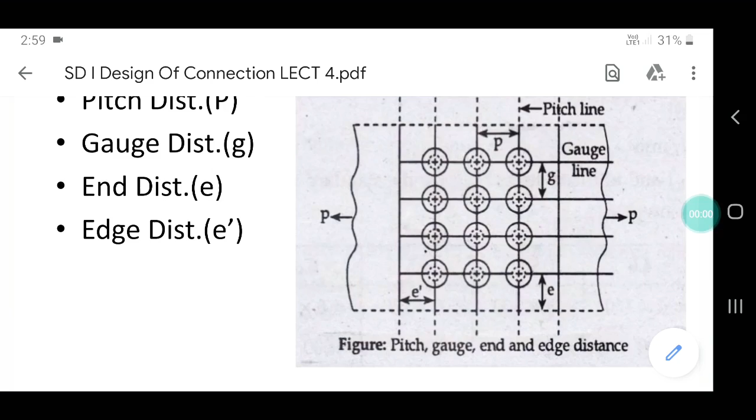I'm Professor Kakade. We are learning Structural Design 1, the second chapter, Design of Connection. This is the fourth lecture of Design of Connection. In the last lecture, we studied the joints of bolted connections. There are two kinds of joints, that is lap joint and butt joint.

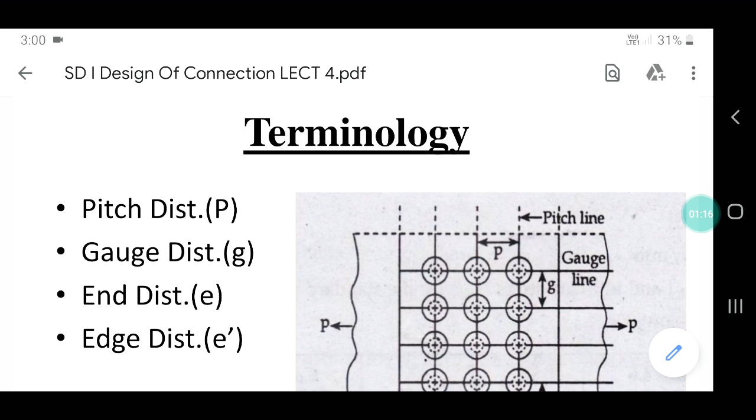In this type there are divisions like single cover butt joint, double cover butt joint, single bolted lap joint, and double bolted lap joint. Their advantages, disadvantages, and all the terminology we studied in the previous lecture. In this lecture we are going to learn about the terminology and failure of bolted joints. These two points are going to be covered in this video, so stay tuned.

The terminology contains four distances. While we are designing the connection, there are some notations or values required for the design. In such situations, we have to know about this terminology, what is its definition, and what is its maximum and minimum limit. On the right side of the screen, you can see the figure of this whole terminology: pitch distance, gauge distance, end distance, and edge distance.

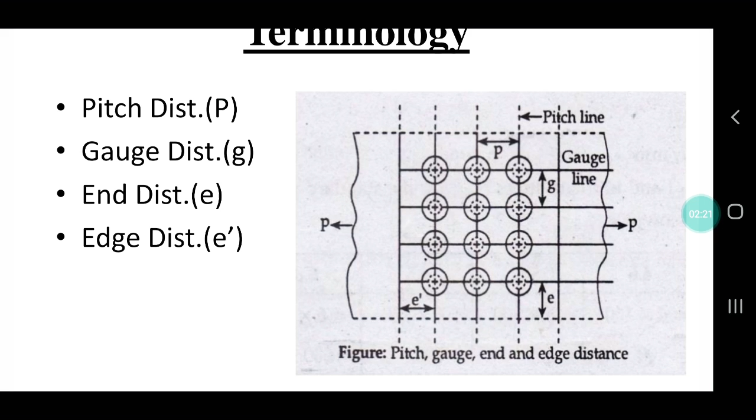The notation for the pitch distance is P, for the gauge distance G, for end distance it is E, and for edge distance it is E dash. So what is meant by pitch distance? It is the distance from center to center of a bolt in the direction of applied force.

I forgot to refer here, there is a P, arrows on the left or right side of the plate, which show the force notation, like the force acting in the tensile direction of value P. This arrow shows the direction of the load, and the center to center distance between two bolts in the direction of the load or force is known as the pitch distance. So it is the distance between two bolts.

Next is the gauge distance: the distance between two consecutive bolts perpendicular to the direction of force is known as the gauge distance. Sufficient pitch and gauge distance should be provided to avoid the different failures of the connection. That's why this terminology came into the design chapter, to show the different notations and their importance.

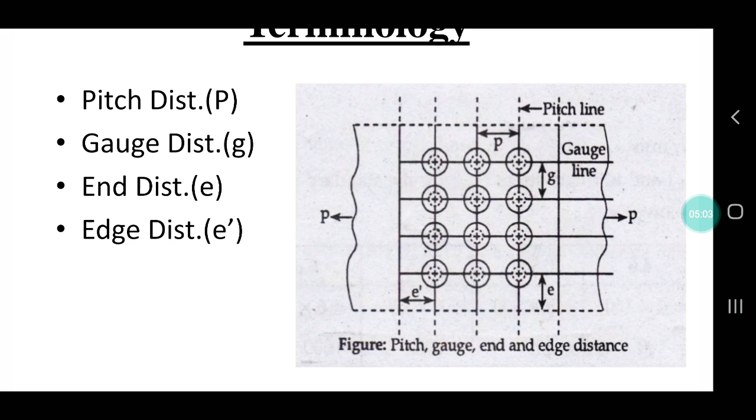They are interrelated: pitch distance and gauge distance are interrelated, and end distance and edge distance are interrelated. The difference is that pitch distance and end distance are in the direction of force, and gauge distance and edge distance are perpendicular to the direction of force.

There are other specifications which we require while designing the connection. The first one is the diameter of hole. While inserting the bolt into the hole, it might be quite problematic when it is not vertical. Generally it is not always vertical, or there might be some problem. That's why we have to keep some clearance to insert the bolt.

In such a situation, what should be the clearance? It is referred to in this table. The table shows serial number, nominal diameter of bolt in mm, and standard clearance. How much clearance should be provided for different bolt diameters is shown in this table. If the diameter of a bolt is from 12 mm to 14 mm, the hole should be greater by 1 mm. So if the diameter of a bolt is 14 mm, the diameter of hole will be 15 mm.

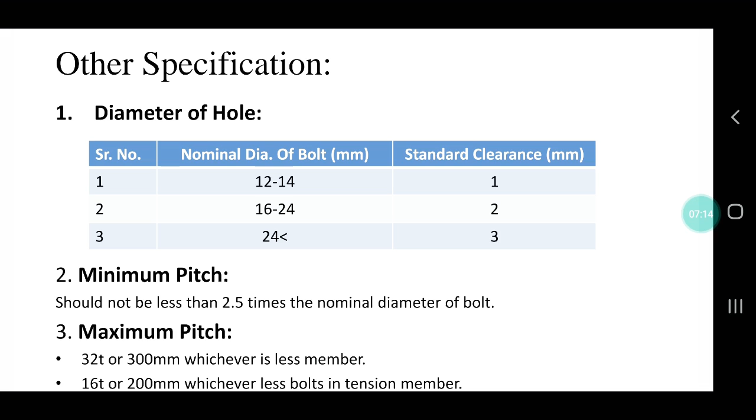I have to mention here, when we do the design, the nominal diameter of bolt is indicated by small d, and the diameter of hole is indicated by d0. Next, if the diameter of bolt is greater than 24, the standard clearance is 3 mm. Like if the diameter of a bolt is 27, the diameter of hole will be 30 mm.

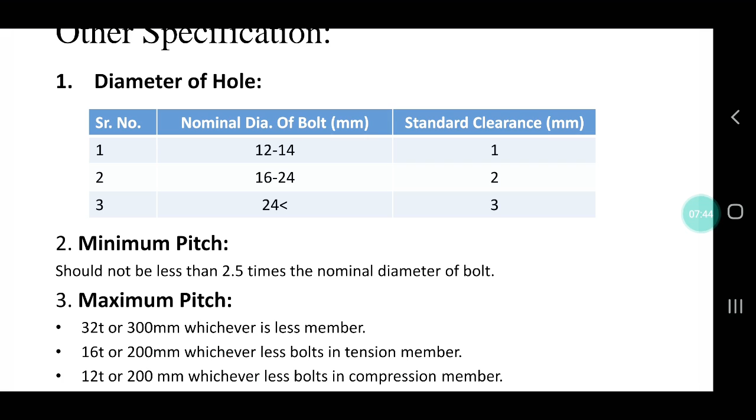Next point is minimum pitch: the distance between the centers of the bolts in the direction of load should not be less than 2.5 times the nominal diameter of a bolt. This is important. Why is that kind of specification included in IS 800:2007?

The reason behind that is, if we reduce the pitch distance, here we can see, consider these two bolts which are showing the distance P, which is pitch. If we bring these bolts closer, the stress in the area between these bolt holes is tremendously increased. Area is reduced, load is constant, so stress will be increased.

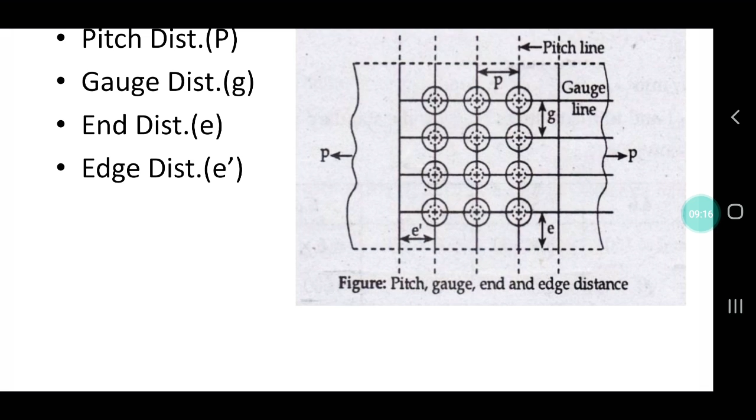In such a situation, if the stress increases, the chances of failure of that area are more than the other areas. So that's why the minimum pitch distance is considered and provided. So what is it? It is 2.5 times the nominal diameter of the bolt.

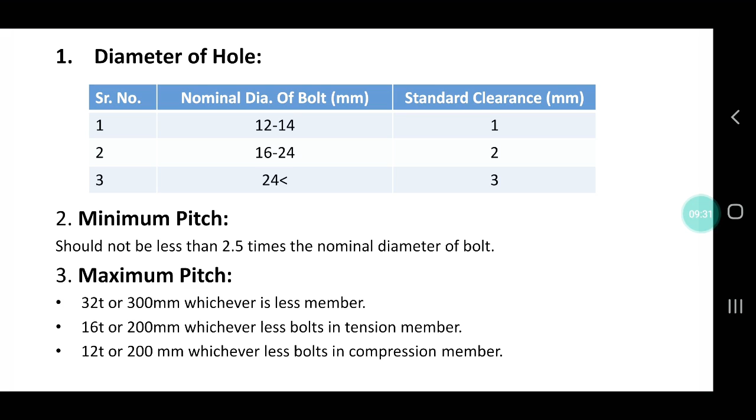Next point is the maximum pitch. Why should the maximum pitch be considered? If we increase the pitch, the distance between two bolts is very high. In such a situation, the stress transfer or the connection between the two members might be loose, and it will cause a problem. Bending or shearing problems could happen.

So that's why maximum pitch is also mentioned here: 32T or 300 mm, whichever is less, for the bolts in members including tacking bolts. What are tacking bolts? Tacking bolts are bolts provided at the middle of the members, not only at the connection. We provide bolts at the connection, but when we provide bolts at the middle of the member, those bolts are known as tacking bolts.

So when there is a tacking bolt, the maximum pitch distance should be 32T or 300 mm. What is T? T is the least thickness of the member, so you should take the least thickness of the member. Second point is 16T or 200 mm, whichever is less, for the bolts in a tension member. When there is a tension member, the maximum pitch should be 16T or 200 mm.

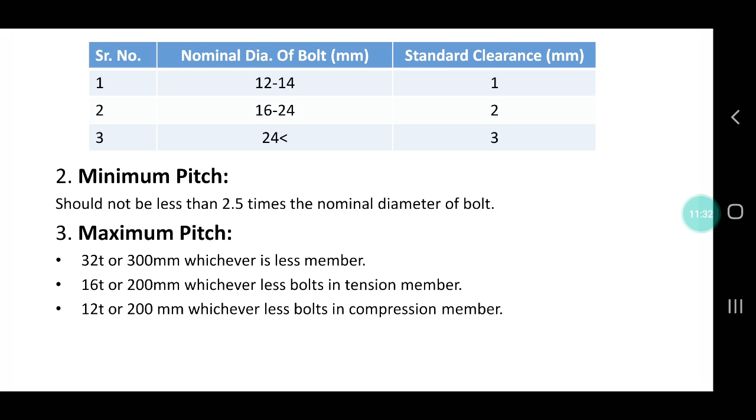Next, 12T or 200 mm, whichever is less, for the bolts in a compression member, where T is the thickness of the thinner plate. So 12T or 200 mm for the compression member. So here you can see that for the tension and compression members, the maximum pitch is different. For the compression member it is less, and for the tension member it is more.

Next point is the edge and end distance. The minimum edge and end distance from the center of a hole to the nearest edge of the plate should not be less than 1.7 times the hole diameter for sheared edges. So here consider the hole diameter. I have explained previously that the diameter of a bolt and the diameter of a hole are different, having some clearance. So minimum edge distance or end distance will be 1.7 times the diameter of the hole.

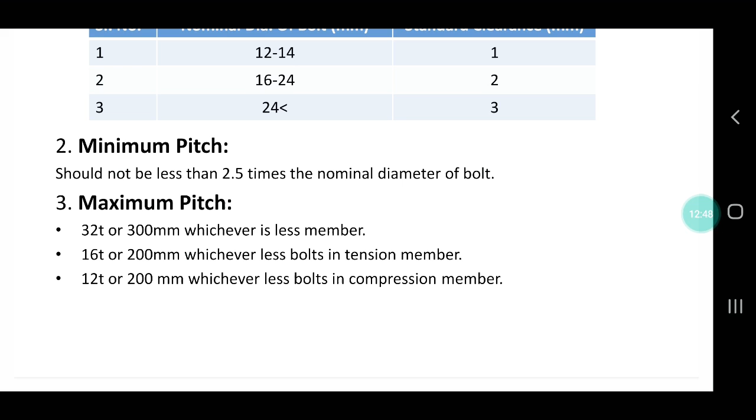Next, explanation for tacking bolts. I have explained that tacking bolts are at the middle; these are additional bolts provided other than for strength consideration. The maximum pitch of these bolts should be 32T or 300 mm, whichever is less, where T is the thickness of the thinner plate.

If the members are exposed to the weather, the pitch should not exceed 16 times the thickness of the outside plate or 200 mm, whichever is less. So if these members or connections are exposed to the atmosphere, we have to reduce the maximum pitch. Why? Because when steel structure members are exposed to the atmosphere, corrosion might happen and the strength of the member might be reduced.

Next point is the maximum edge distance from the center of the hole to the nearest edge should not exceed 12T. So maximum edge and end distance should not exceed 12T, where T is the thickness of the thinner plate or thinner member.

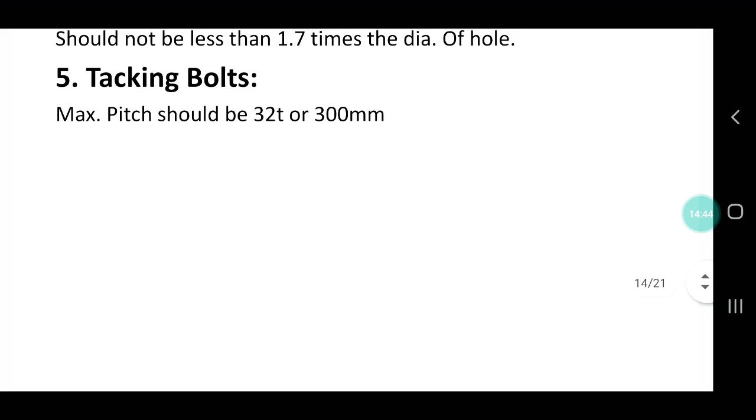So these are the different specifications we have learned in today's lecture, and in the next lecture we are going to see the failure of a bolted joint. Why should we study failure of bolted joints? There are 6 types of failure. Not all the failures are considered while designing the members.

A few failures are considered while designing the members, because we have to check whether whatever we have designed, or the number of bolts provided, will sustain different conditions. So these different conditions we have to check under these failure conditions. So in the next lecture we are going to see these failures.